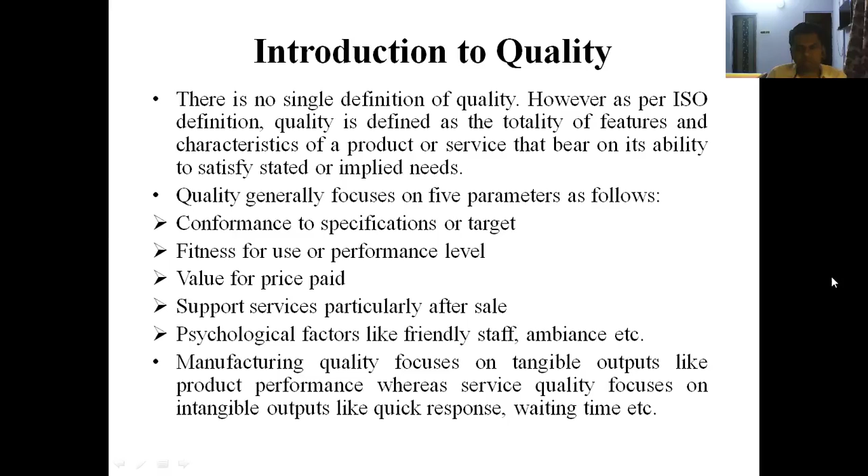That's why nowadays, when you study production and operations management, these sorts of subjects or courses, you will find at least two or three lecture sessions that are based on quality control.

So this is actually the objective of the study: if in future you work in sections like quality control, then this course will help you gain the basic knowledge of quality control and how to implement different concepts. And the most interesting part of this course is that you will learn different types of quality control tools, and you can apply those tools in real life. So that is the most important benefit of this course.

And also, if you do not work in the quality control department, it is quite expected that in future, when you get higher positions, you will obviously need to focus on the quality aspects. So that is very important.

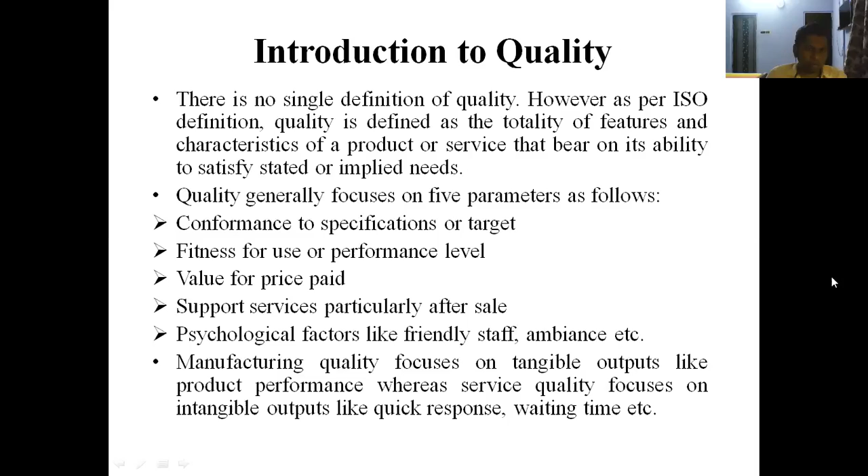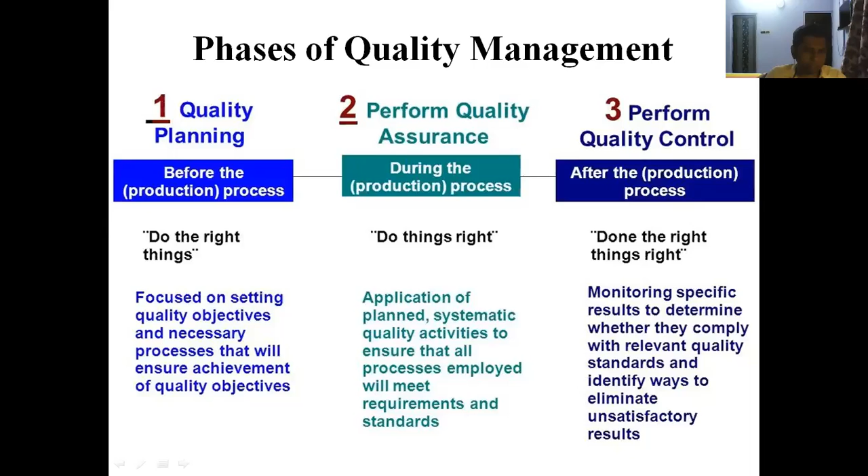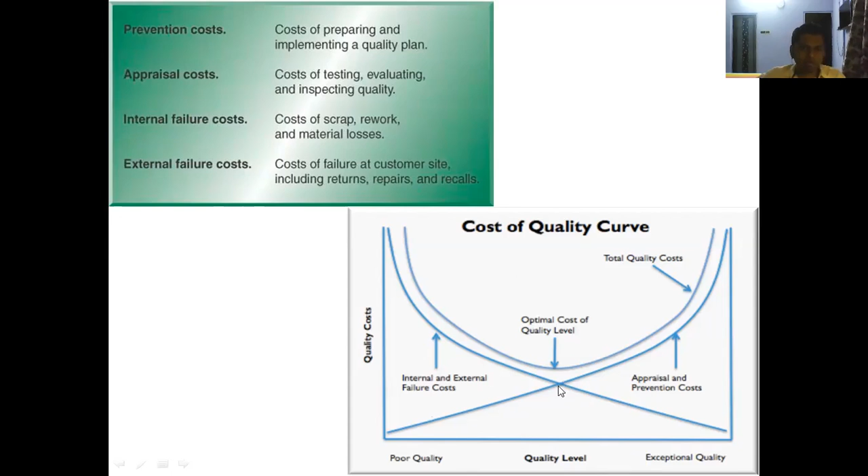Why is this optimization required? Because you want to know how much quality level I should maintain and what should be its cost. Because if you maintain too much quality level, then automatically your cost will be too high. I mean, your prevention and appraisal cost will be very high. But at the same time, if you want to reduce the quality level, then your internal and external failure cost will be very high. Okay, so to balance these costs, you require this approach.

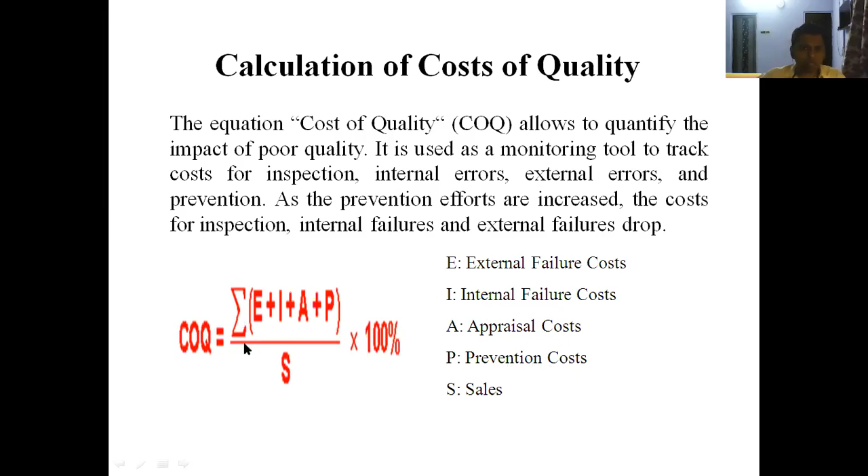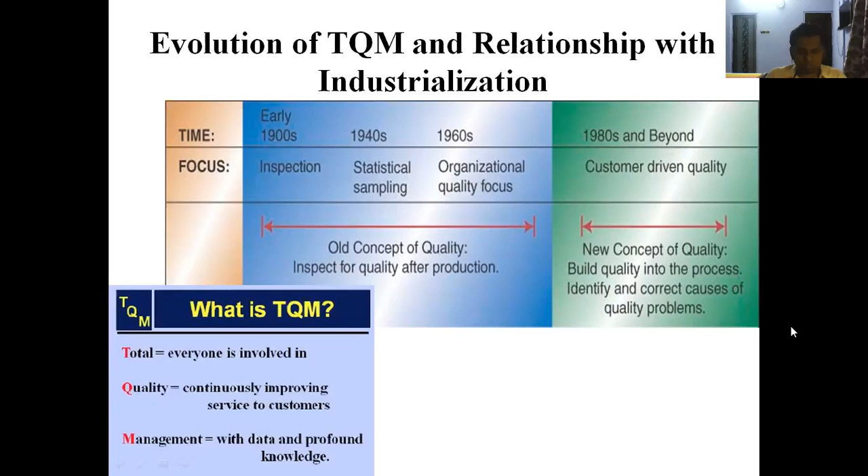Okay. Now I will discuss three key figures of quality management: Deming, Juran, and Crosby. These are known as the three quality gurus. Deming proposed a lot of quality concepts. For example, Deming proposed the PDCA cycle, plan, do, check, act cycle, which is very popular. There is Juran's quality trilogy and Crosby's zero defect approach. We will know these concepts in detail later on.

And apart from these key figures, there are also some other quality experts, like Ishikawa. Ishikawa's fishbone diagram is very important. There is Taguchi's experimental design approach. So there are also other quality gurus we will discuss later on.

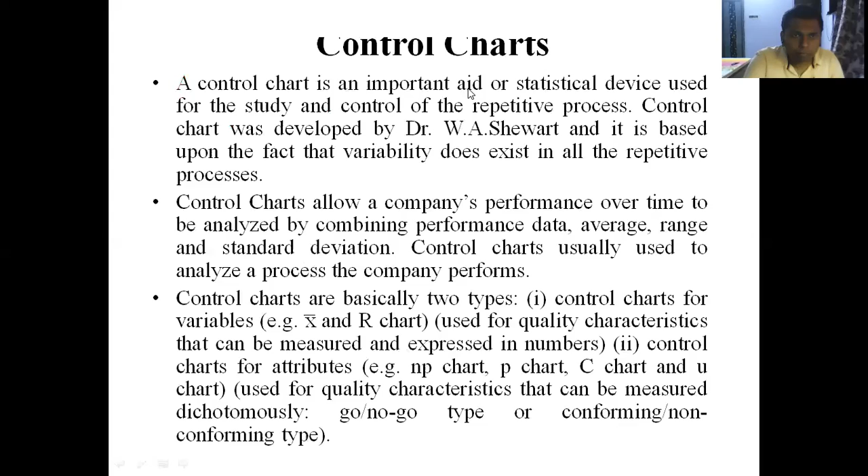One is control chart for variables. This we will discuss. Control chart for attributes. This we will discuss. And we will also discuss some other special types of control charts like CUSUM chart or EWMA chart, which we will also take care of.

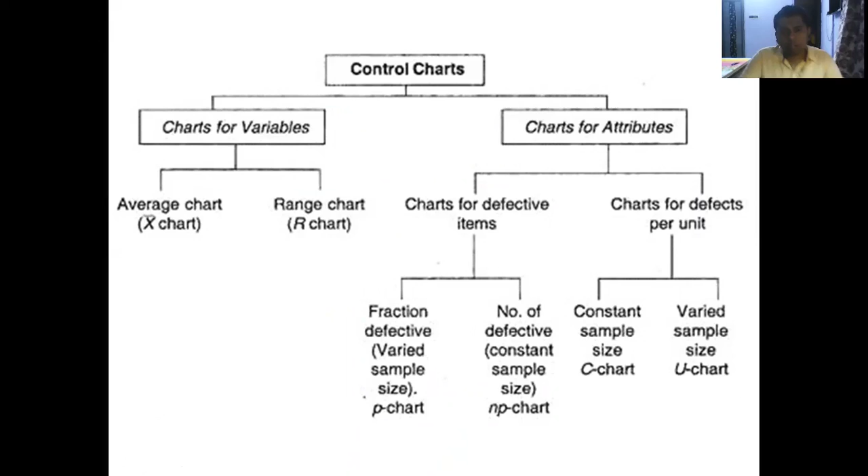But the basic concept in quality management, we will obviously discuss all these things, but some intuition of quality control or quality management we will also try to provide. For example, whenever we talk about dimensional accuracy, we basically talk about some upper control limit and lower control limit.

These two limits are there, and there are also terms known as upper specification limits and lower specification limits. Specification limits are provided by the customers, and the control limits are provided by the process itself. We will discuss control limits and specification limits in much more detail, but it's better that I present an example, because if I start my second lecture with an example, I think the idea will be very much clear.